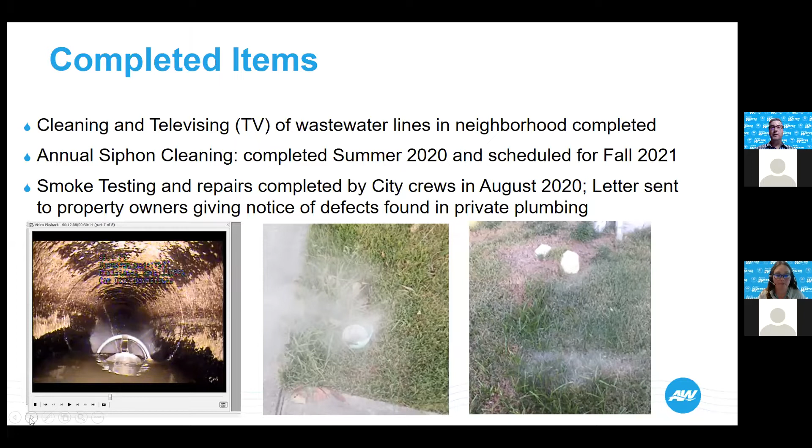The box is an area that treats the air, so it cleans the odors from the air. We have completed our initial testing, and we're planning to continue additional testing and evaluation this summer and fall. So this is a temporary unit. We do a lot of these pilot projects just to see the response from the collection system, and we will continue to evaluate and look at potential long-term improvements based on the results of this pilot.

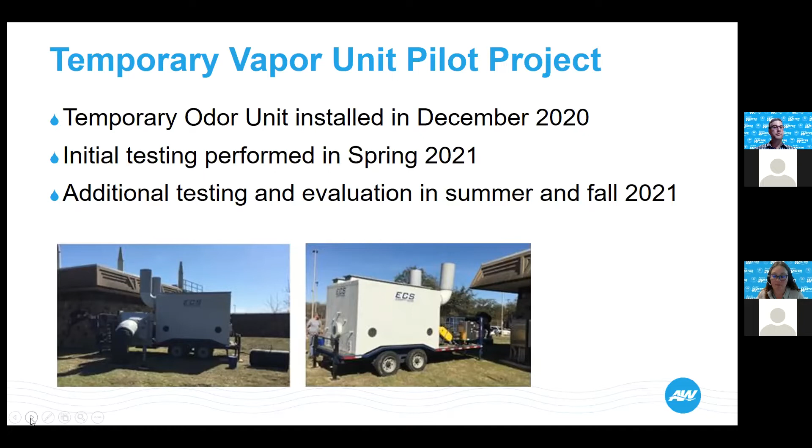So our next steps are that we're going to continue to monitor the neighborhood and collection system and other odor sources that are potentially in the neighborhood. We have a slide at the end where we mention if you do smell odors in the neighborhood to call our Austin Water Dispatch. We continue to log and investigate every odor complaint that occurs, and so we're going to continue to do that.

And the other big thing that we've got ready, and we've got a guest speaker to talk about, is what we're calling the Greater Walnut Wastewater Treatment Plant and Collection System Study. We'll talk about that in a minute, but it's a comprehensive look at the odor sources in and around the neighborhood from not only the collection system, but also the treatment plant and other sources, maybe industrial users or industrial compounds in the neighborhood.

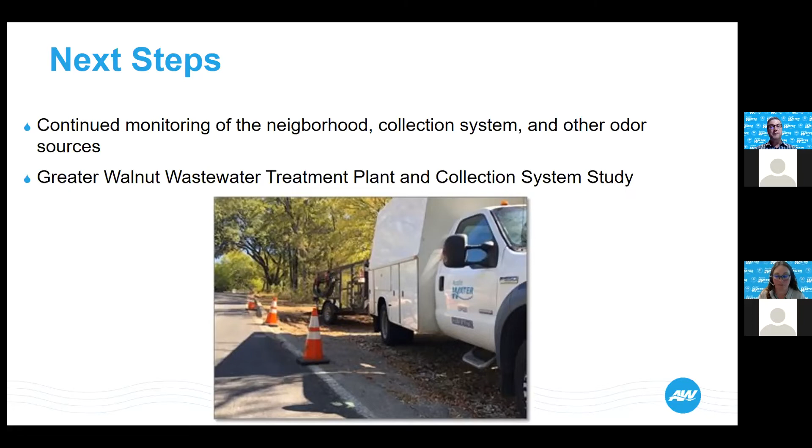This is the intro to that. We've got Dr. Rodrigo Gonzalez Abraham on, who works for a consultant, Jacobs Engineering. I'm going to hand it over to him to give an overview of the study we're going to do. This will be an independent review by an outside firm that's going to look at all of the sources and areas around Walnut Creek Wastewater Treatment Plant and the collection system for odor and make recommendations for us on what to do. So with that, Rodrigo, I'll hand it over to you.

Thank you, Kevin. Hi, everyone. My name is Rodrigo Gonzalez Abraham, and I'm a Jacobs technologist. I'm going to talk to you about the Greater Walnut Creek Wastewater Treatment Plant odor study.

What are the goals of the project? There are three main goals. First, to measure the odors from possible sources, either at the Walnut Creek Wastewater Treatment Plant or other facilities that are not city operated. We're going to evaluate the impacts of other sources on the community, and we're going to evaluate possible solutions. We're going to communicate progress and results to stakeholders and the community.

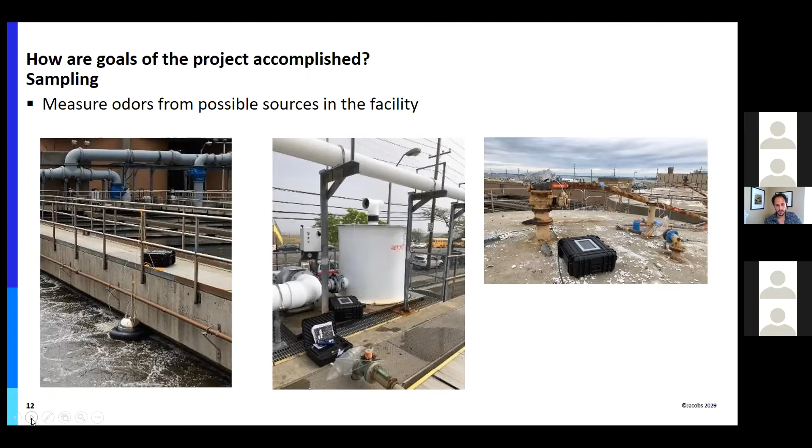So how are the goals of the project going to be accomplished? The first goal, we're going to measure odors from possible sources in the facility. These are just examples of previous projects - as Kevin mentioned, this project is just starting, so this is not happening at this facility yet. These are examples of measurements at other facilities that had similar issues. We measure the water being treated, or leaks and valves throughout the facility, or release valves, either throughout the pipes in the facilities or in other reactors, like the anaerobic reactor you see on the right side.

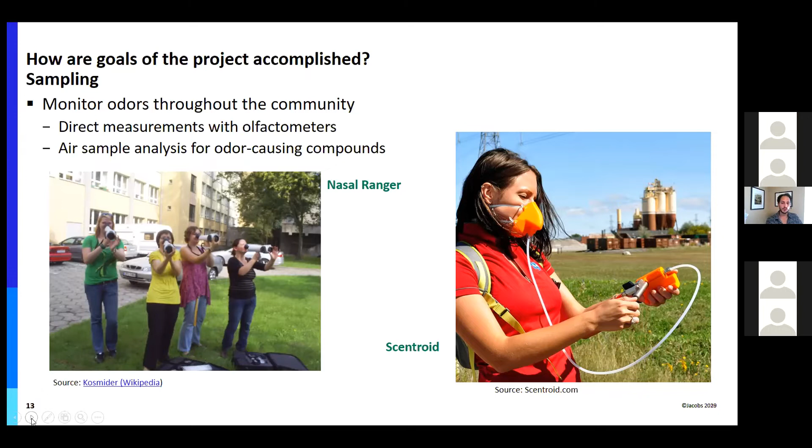Not only are we going to measure at the source, but we're also going to monitor odors throughout the community. What you see here on the left, that looks like a very long snout, is the nasal ranger used to measure directly. These are called olfactometers, and we measure directly around the facility, outside and inside. Any type of community involvement will be discussed in later meetings.

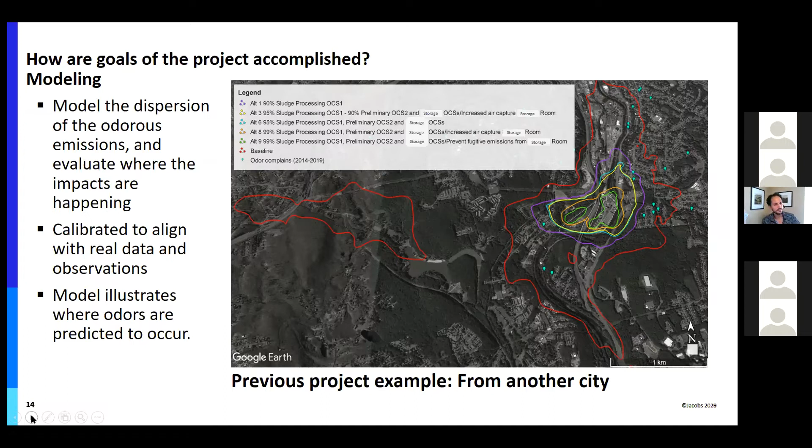Then we're going to communicate those results. We'll have three public meetings throughout the project: at the beginning, in the middle, and almost at the end, but not at the end. We're going to have effective and frequent communication with the community and stakeholders, providing ways to receive comments via surveys. We'll also provide training material regarding odors, so the community can tell us where a rotten egg smell or a fishy smell is coming from. If it's bubble gum, it's probably at the bottom of your shoe - I'm just kidding. But we'll train the community to identify those odors. We're going to present the results and co-develop practical solutions.

With this in mind, we're going to develop effective solutions to address community expectations. We're going to go beyond business as usual to develop sustainable solutions with effective communication with the community, taking the community as a partner in subject matters, because you know where this smells, and we want to hear from you. We're going to design out the risk rather than mitigating it - that means preventing it. We're going to identify what is possible throughout this methodology. The project is just starting, so there is lots more to come.

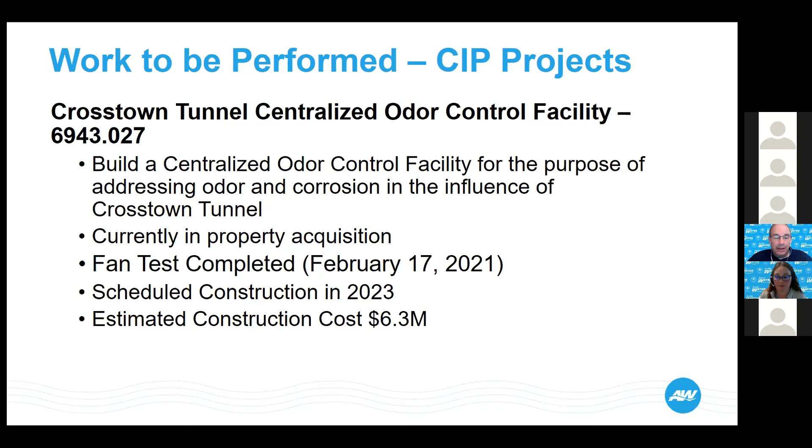This project has completed preliminary engineering. We're about to start the final design, and I have a couple additional slides to show that. This is a little over a $6 million project.

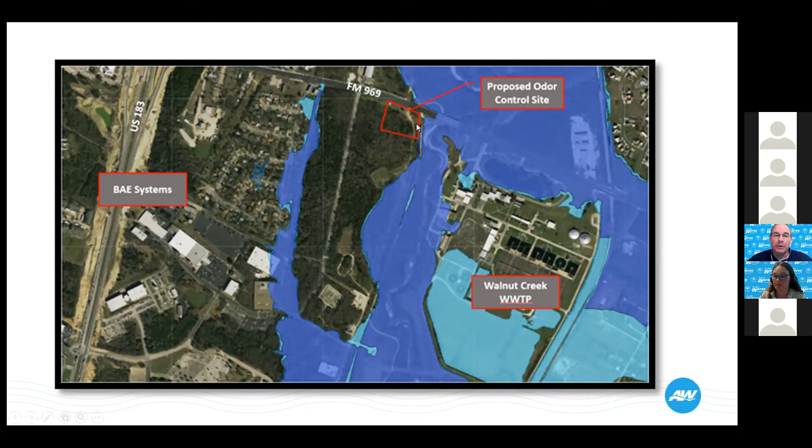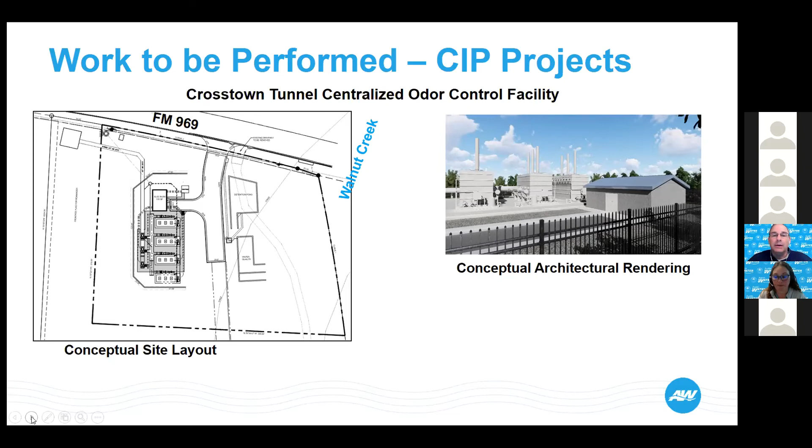The picture on the left is a conceptual layout showing the approximate sizes. We still need to go through final design, so it's subject to change and probably will change - that's kind of the size of the unit. To the right is a conceptual architectural rendering of what this unit will look like; again, it's just a conceptual rendering, not a specific rendering of the site shown to the left. You can see they're kind of like metal boxes, large container-style boxes containing the natural filter media, and air will be blown through those boxes, with chimneys dispersing the air into the atmosphere.

The Greater Walnut Centralized Odor Control Project is similar to the Crosstown Odor Control Project. This project is completing preliminary engineering, and the completed fan test from February 2nd is being incorporated into the preliminary engineering report. That report will be released with recommendations and technical evaluations of where additional odor control units would provide

the best mitigating impacts for any odor that may be leaving the Walnut and Little Walnut interceptors. This project looks at the pipes headed northwest of the plant, up through the Harvey Penick golf course area and the 183 and 290 interchange, whereas the Crosstown tunnel, as the name notes, is more to the west as it moves across the city. So it's the same concept, just a different location on some different gravity pipelines.

This project is scheduled to be completed in the 2024-2025 range, and again it's about a $6 million project.

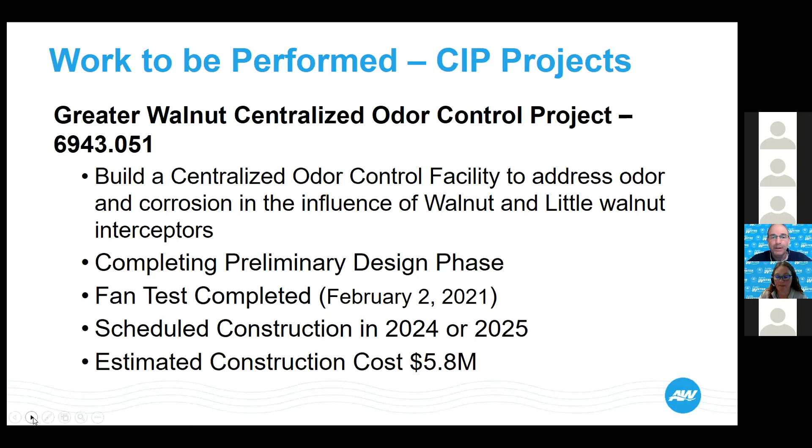Next slide, please. We wanted to highlight one of the projects we talked about in the past, at Walnut Creek Wastewater Treatment Plant, which we call the secondary improvements. It's about a $24 million project and is about 60% complete. Parts of the plant are 40-plus years old, and this project is replacing some of that equipment.

On the left side, you see the aeration improvements. That's replacing the disc diffusers, the air discs at the bottom of the basin, which produce fine bubbles that go through the water. The aeration basin treats the incoming organic material, and as that material is suspended in the water through the air, it's constantly mixed. After a set hydraulic time, the amount of time water stays in the basin, it's discharged into the next component to the right, called the clarifier.

The clarifier settles the water to a very still state, and the processed organic material falls to the bottom. At the bottom of the clarifier are what we call rakes, which pull all the solids to the center. Those solids are then transported to another facility called Hornsby Bend Biosolids Management Plant, closer to the airport, which does further treatment into a beneficial reuse composting material.